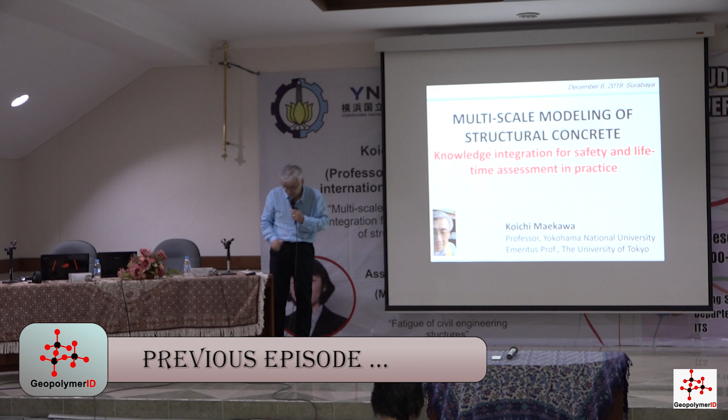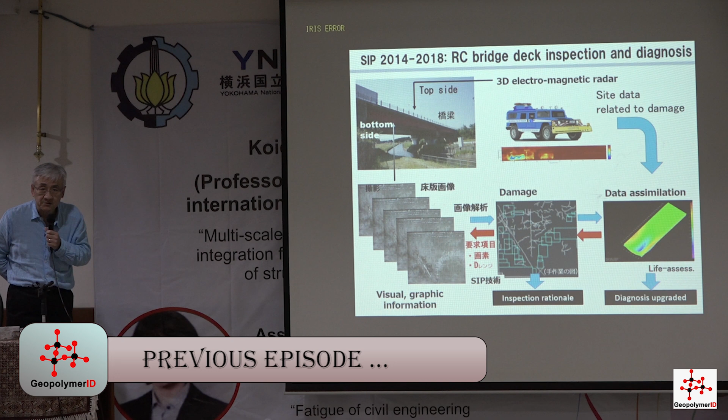Today, I'd like to just talk about the multi-scale modeling of the structural concrete. But this is just so. It used to be my hobby. We have to think about the life, remaining life of the structure. This was already used. When we construct a new structure from now on,

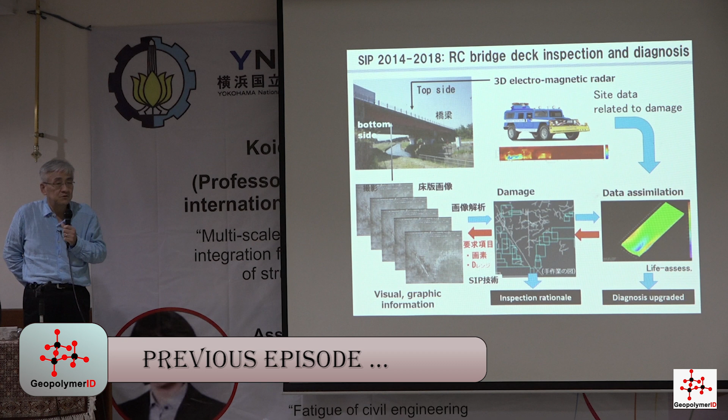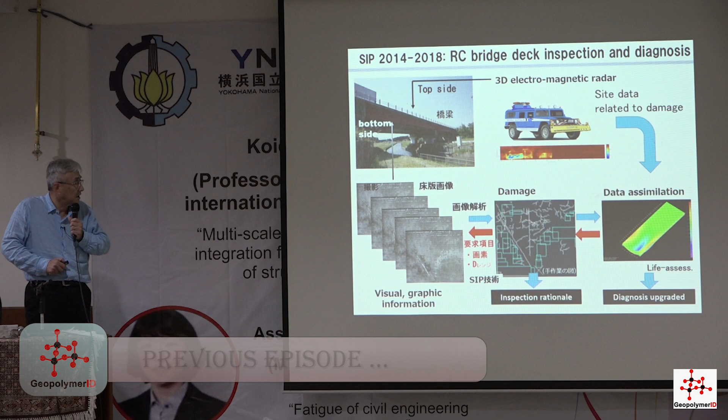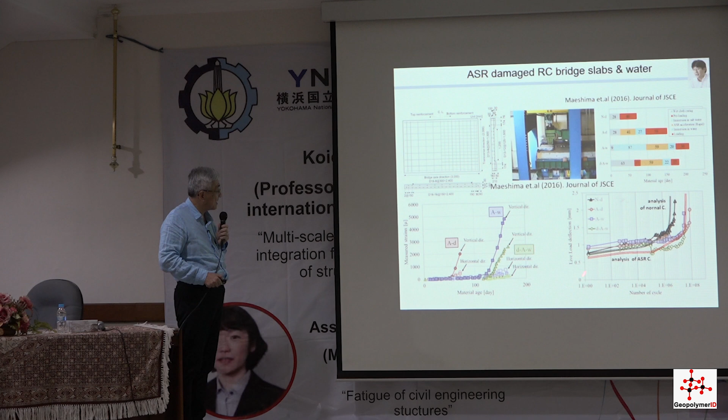then this is experimental facts without any ASR damage. This is a number of cycles and also deflections. Without any damage, this is a prediction. In this experiment, at about 1 or 2 million cycles the structure fails. But if the ASR occurs, life is around 10 million cycles. Like this. So this is true because damage is introduced, but the volume is expanding.

But the reinforcing bars exist. Therefore, counter compression force is applied to the slabs. Therefore, permanent stress level is higher, but amplitudes of the stress caused by the traffic become small. Fatigue problem is mostly governed by the amplitudes. Therefore, so much damage, but because of the presence of the reinforcing bars, life is prolonged.

Another thing is that in case of the normal concrete, if we have water on the structures, I said that life is shortened about 100 times or 1,000 times. But Professor Iwaki of Nihon University put water on ASR damaged structures and applied load, and life was not shortened. With and without water, life does not change.

Very simple. Because of a lot of cracks, water comes, but very easily the water drains. Therefore, pressure of the water does not rise. Therefore, damaged concrete has a high performance against this. Therefore, very unfortunately, the Japanese government, when we have ASR, oh my God, injects chemicals and stops the traffic, so much money, so much time. Then, after that, the performance is lower. But if we don't do anything, life is becoming longer, like this, right?

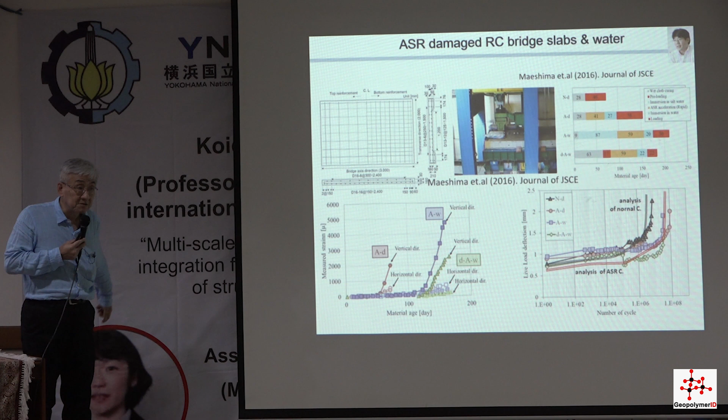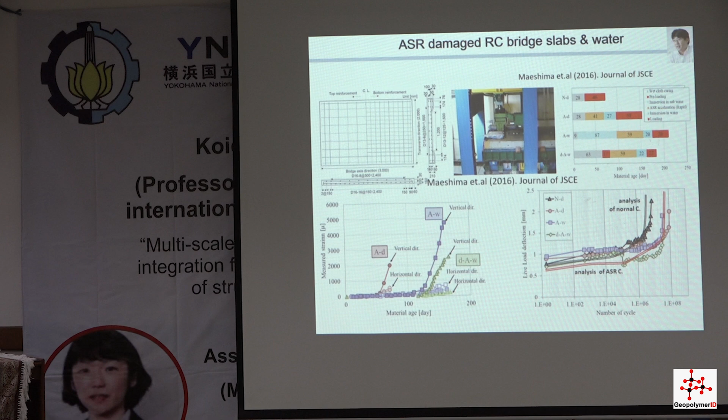Then with this one, some multi-scale models have been used for that type of problem, some damage. But please understand for corrosion, when the corrosion occurs, the life is shortened. But the big problem is that we have top reinforcing bars and bottom reinforcing bars. When we have corrosion in the bottom reinforcing bars, life is not changed. Almost nothing. But if the corrosion occurs on the top reinforcing bars, so much damage. Right? Maybe you understand that.

Maybe the bending compression zone is damaged by corrosion. But the bottom reinforcing bars have some cracking. But I think you know that in bending, there are already cracks. Therefore, even though the concrete in the tension zone will be damaged, structural performance will not change like this. But the very ironic thing is that bottom reinforcing bar corrosion can be seen by naked eyes. Oh my God! But the top layers are covered by asphalt.

Cannot be seen. Therefore, in the past, many engineers found some corrosion on the bottom reinforcing bars. Oh my God! They repaired, but no way, no contribution. Like that, it happens. Therefore, this is a combination of material science, corrosion, and structural engineering.